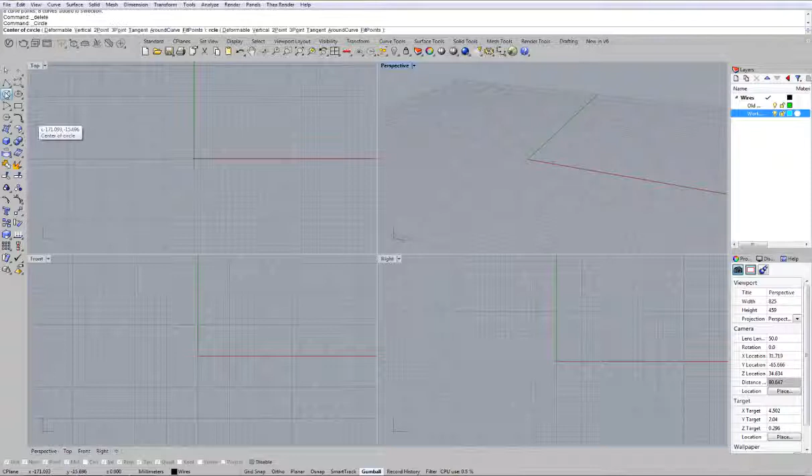We are going to start, like we always do, with a finger ring rail. And this time it's going to be 19.8, which is a men's, or a size 10. It doesn't have to be a men's, but it is a finger size 10. So we're going to put little guides on the sides here. 2.5 millimeter, let me put my Osnap on, 2.5 millimeter for the side here.

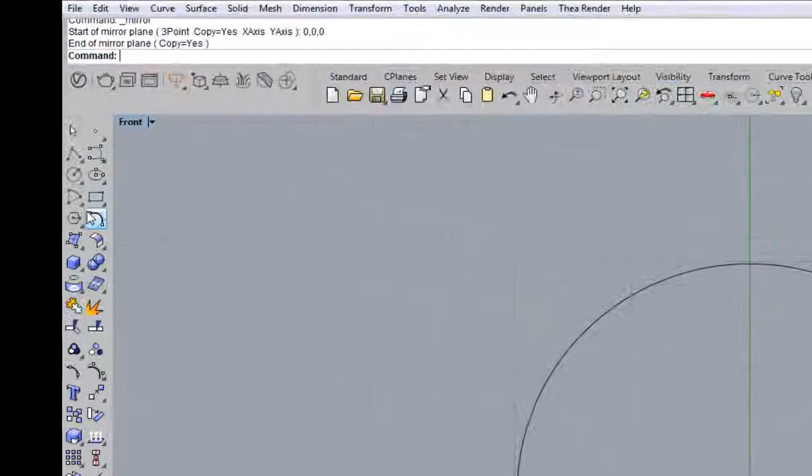Let's do 2 on the bottom. And then we're just going to mirror this 2.5 over to the other side. So now we're going to do an arc. We're going to do a 3-point here to here to here. And then we don't need these guidelines anymore. Get rid of those. We will need one here at the top.

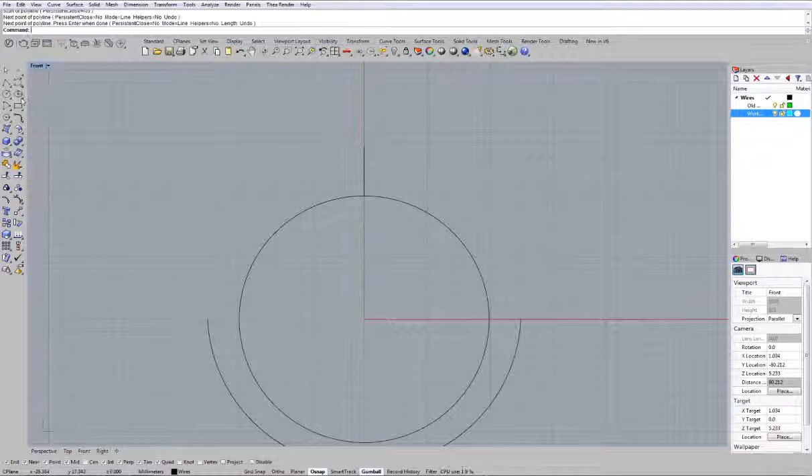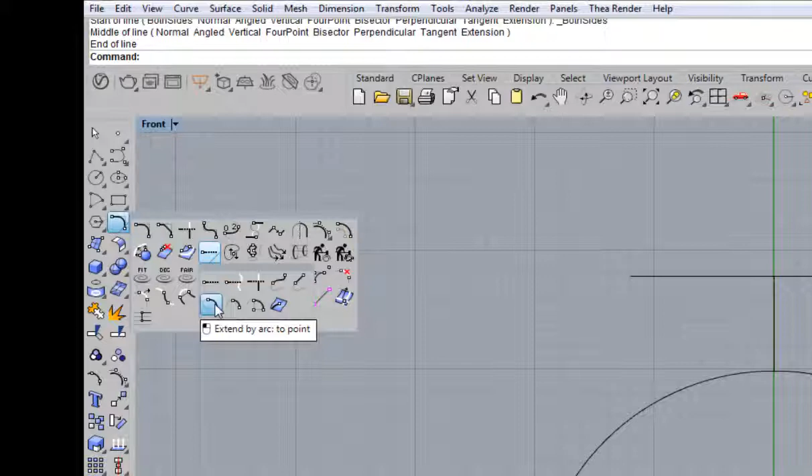And I want to make it about 4 millimeters. That should be plenty of room for a men's signet ring. And then we'll do a little polyline for midpoint. And this is going to be, let's say, 6 on each side, so a 12 millimeter total. Okay, we're going to extend this curve. Arc to point. There's the arc, and then here's the point, and we'll do the other side. Arc to point. All right.

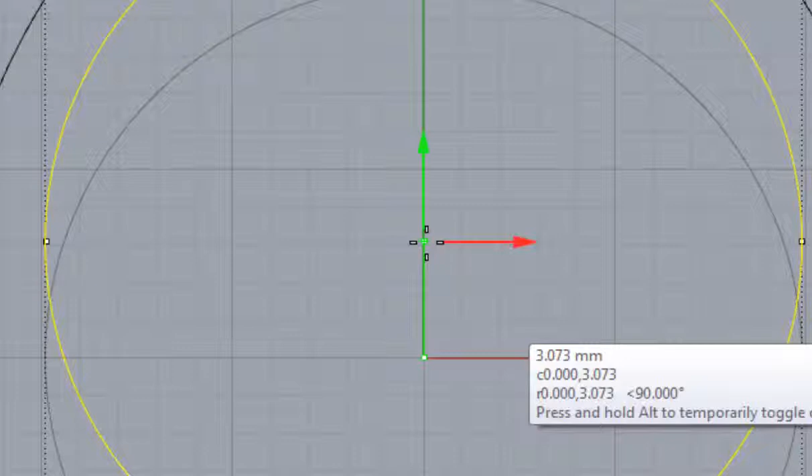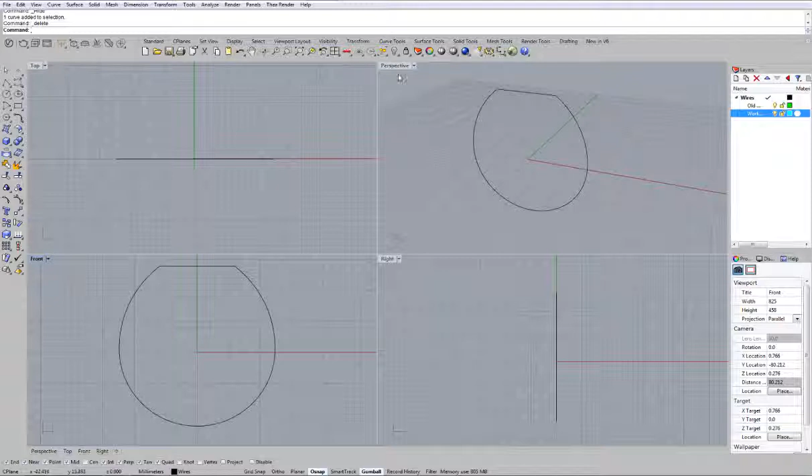And so we'll grab the finger rail, and then we'll bring that up a little bit in order to use that later. And if you tap the Alt key, you'll see the little cross or the little plus sign appear. And so now we'll just take these and hide them for now. And we can get rid of this guide line segment. All right, let's go into the perspective. The first thing we want to do is join this together. And then we're going to move this over 4 millimeters.

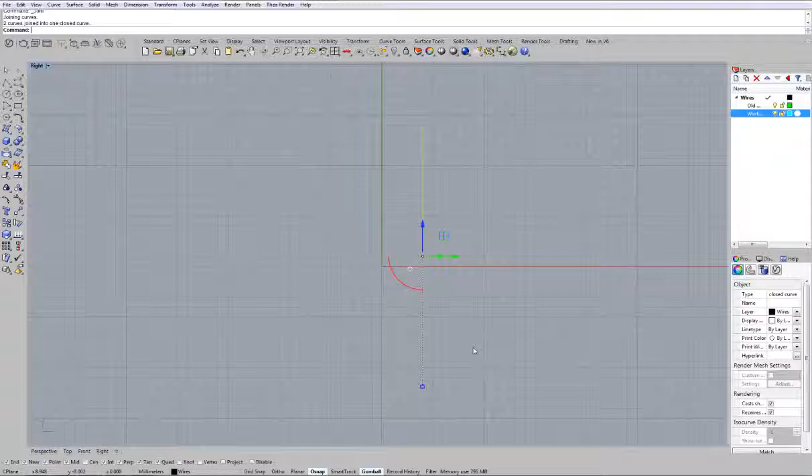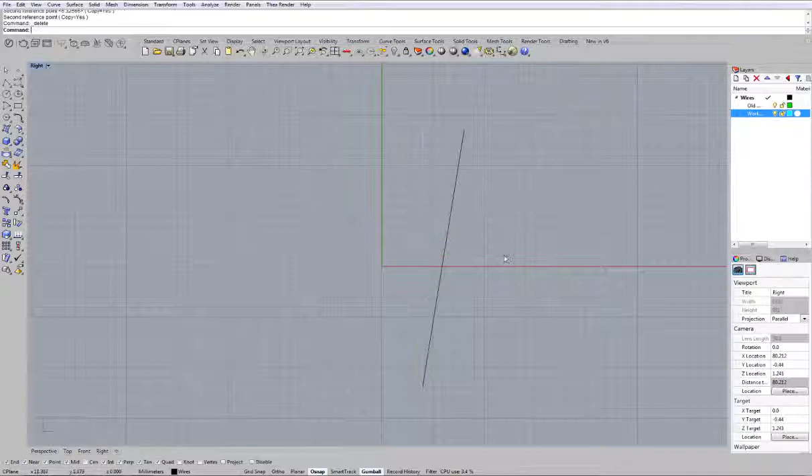All right, let's now go into the right view. And we're going to rotate this a little bit. So from this point, and we're just going to eyeball this. We're going to tilt it because that is going to be our taper. All right, we can get rid of this, and we're going to move this over. Actually, we're going to rotate it over. And now we're going to extrude this.

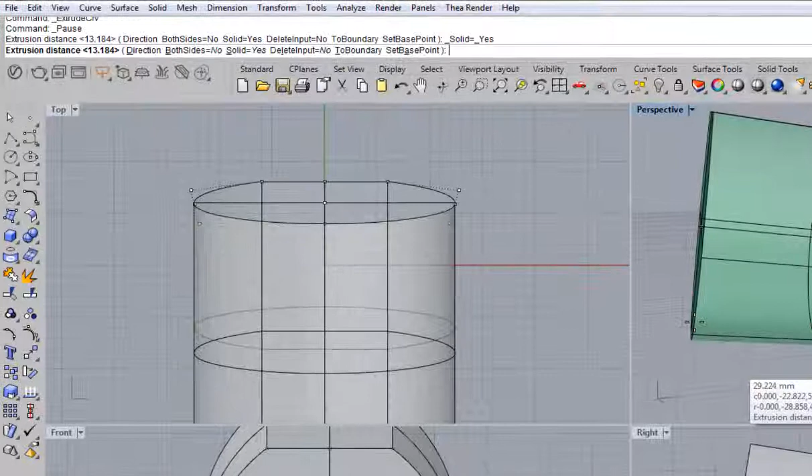So let's extrude. Up here, we need to know that it's not both sides, and then it is solid. But we're going to do it in direction. So we'll snap here, and then we'll ortho it out this way. And then now let's extrude it just beyond that point there. So it's just beyond. And we're going to use this as the trim tool to get rid of that. You see that taper? And now this is open.

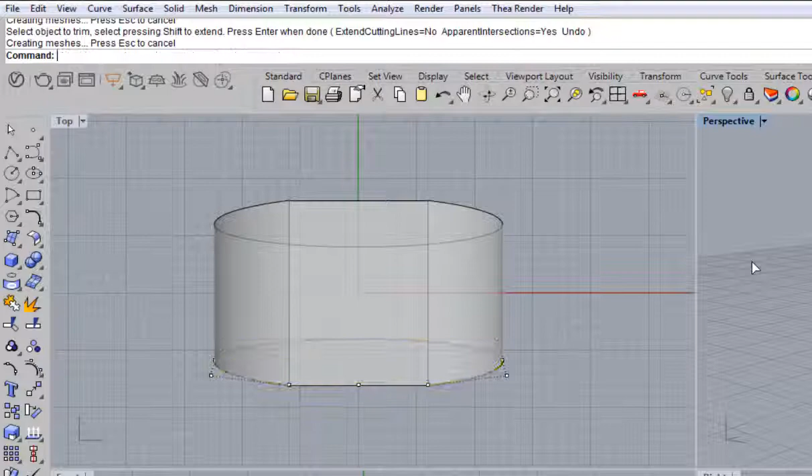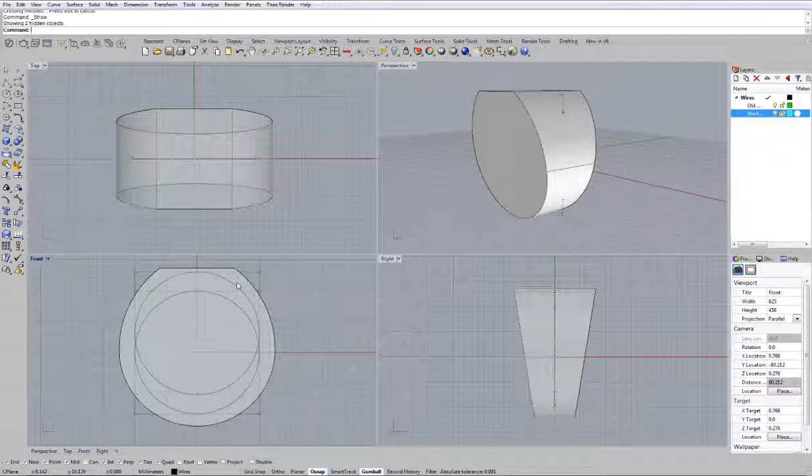So all we need to do is Cap. And there you go. Now we have a solid men's ring. Now let's see our curves again. We're going to choose that rail. Let's hide that. And then choose our finger rail. And we're going to change the color there so that it's easy to see.

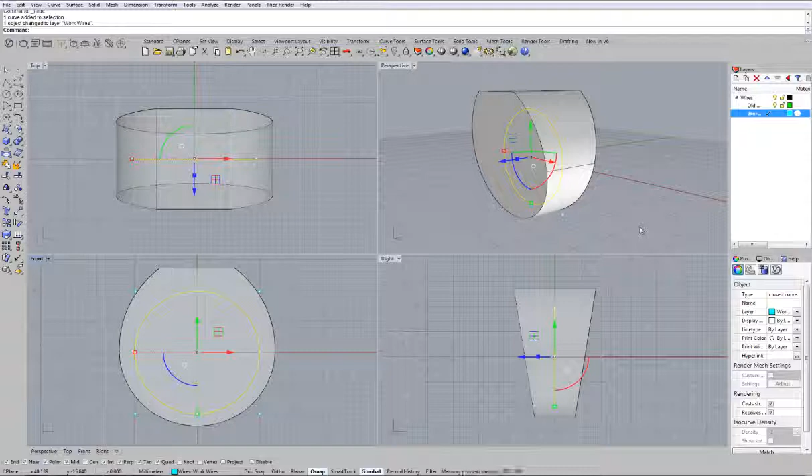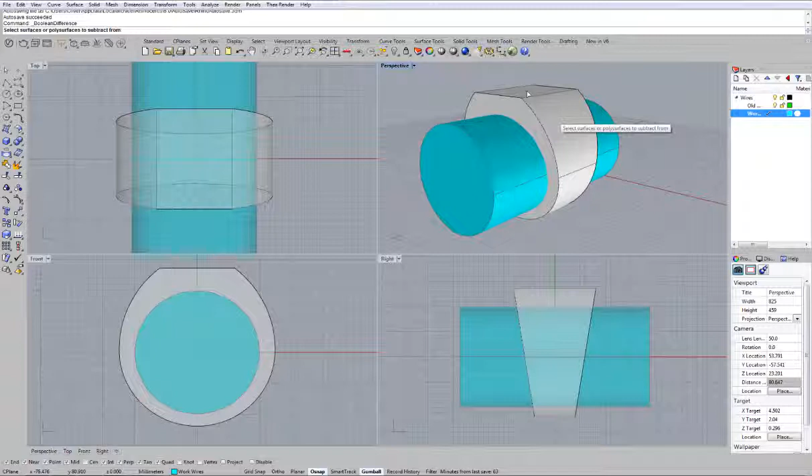Now this time we're just going to extrude straight. So extrude, but we're going to change this to both sides. We've done this before, so now let's boolean difference. You can also do it over here, but we've got it in the pop-up. So subtract from, subtract with, enter. There we go. Now this is a nice solid ring.

It's going to be heavy, too heavy probably. So what we need to do is shell out the inside so that it's not uncomfortable. So let's unhide this curve. We'll select it and we'll do the same process. We need to rotate this, F2, from here to here, and then we'll just eyeball this. We could measure it, but there's really no need.

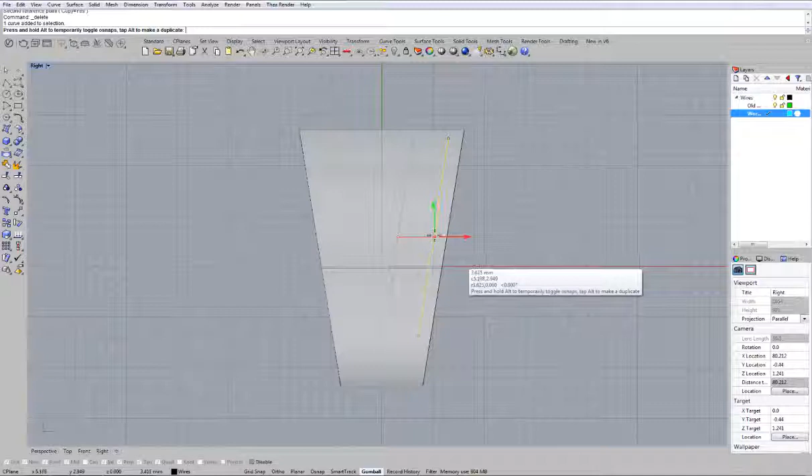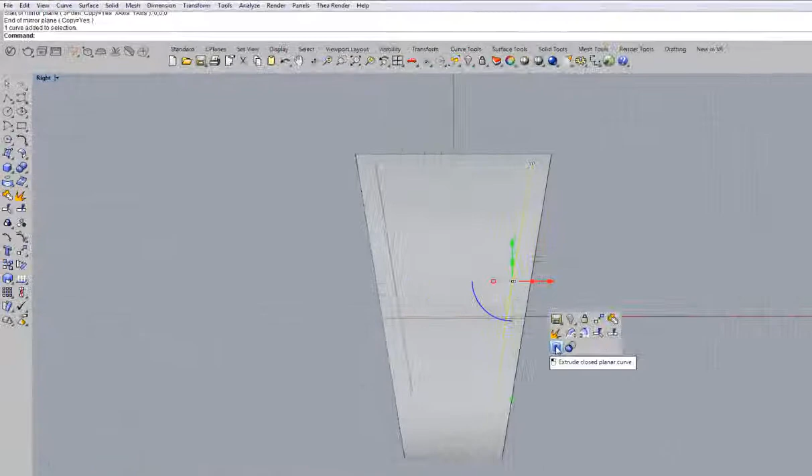Then we'll get rid of this, and then we'll just move this over. Take the O-snaps off so it's easier. You can also press Alt to temporarily disengage the O-snaps, but we'll move that over. And then, of course, F5, F4 to mirror it over. And now we'll extrude it. And again, no to both sides, and we're going to do it in a direction.

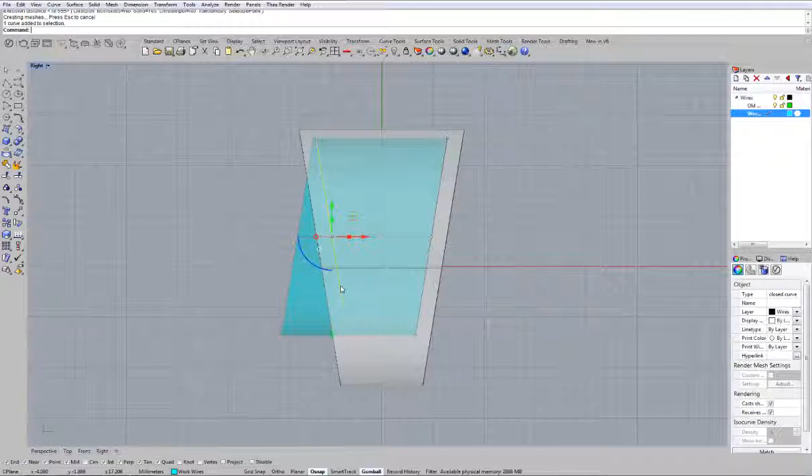We'll snap it. Now I need those snaps. Now we'll snap it here, and then we'll ortho it out just beyond this area. So now we can select this as a trim tool and then trim it. All right. And of course, it is hollow. So what do we do? Cap.

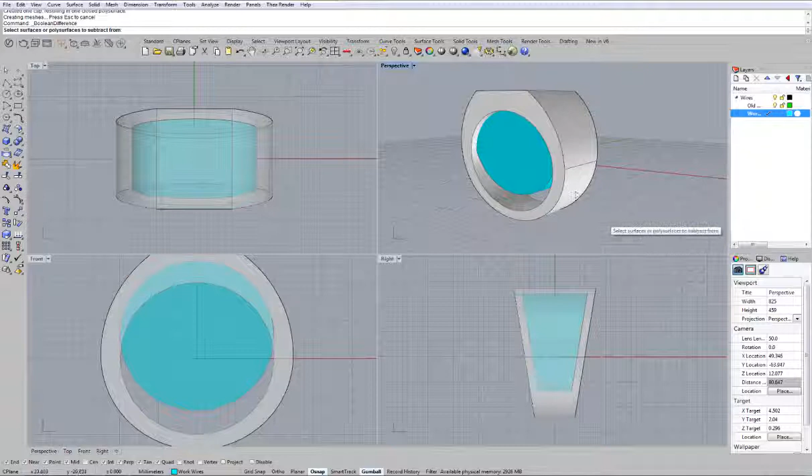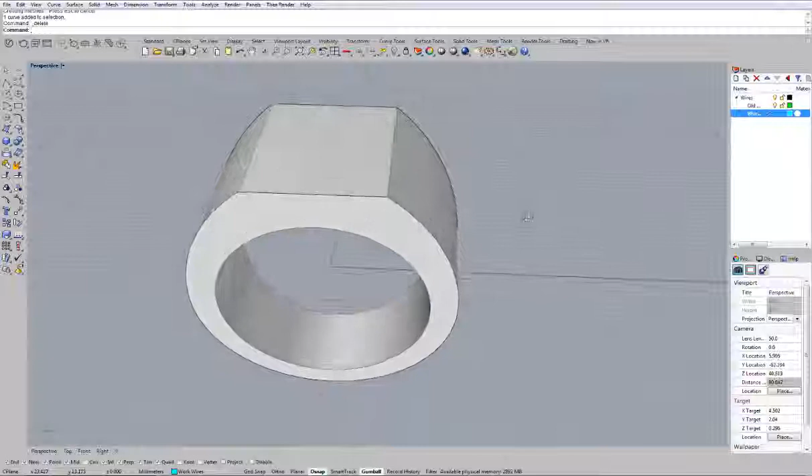And then we can boolean difference. From, with. Then let's get rid of this curve. And there you go. Now you've got a solid, heavy men's signet ring. You can do whatever you want to with that design. That's just the beginning. You can put stones, you can put beading, you can set stones on the through finger on the side. So that's just the blank for your design.